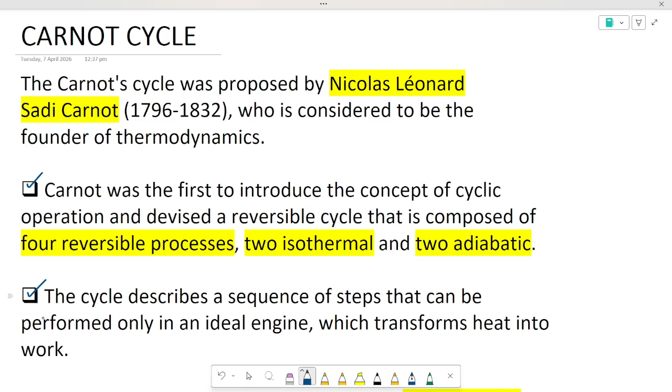Now, the Carnot cycle can be idealized as the most efficient cycle of all. Further, in your mechanical engineering, you will tackle the Otto cycle. That is the classic gasoline engine cycle. Next will be the diesel cycle, kung saan one of the cycles na you will feature the amount of pressure in terms of compression. Ibig sabihin, that is not spark ignition. Compression ignition ang tawag sa diesel. Yung Otto, that is gasoline, you need spark for ignition. Okay? So,

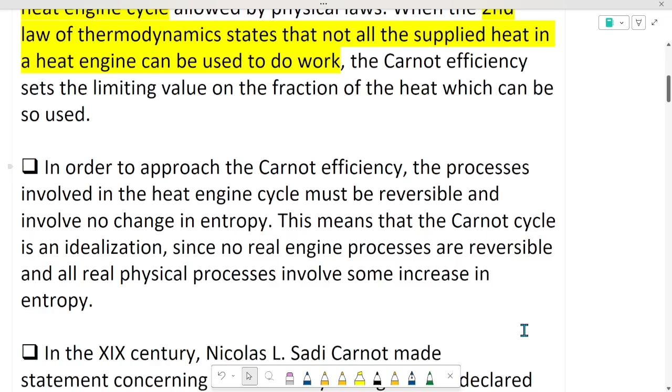sabi dyan, the second law of thermodynamics states that not all supplied heat in the heat engine can be used to do work. The Carnot efficiency sets a limiting value. So, meron lang limit yung value na yun na pwede mo i-convert yung heat mo to specific work. Hindi 100%. Okay? Now, in order to approach yung ating Carnot efficiency, ano kaya yung pinaka-close sa kanya?

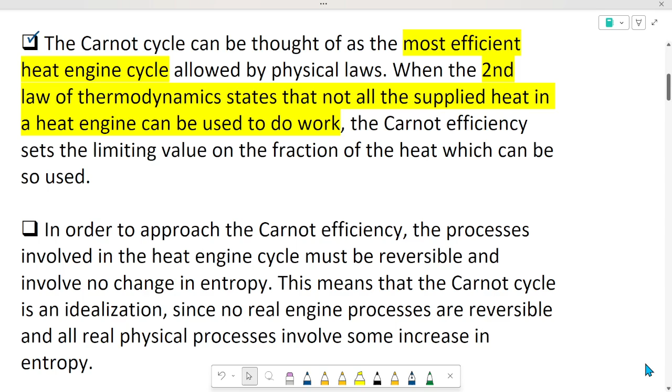So, the cycle must be reversible and involve no change in entropy. Okay, the movement of your molecules. Now, this means that the Carnot cycle is an idealization, since no real engine processes are reversible and real physical processes involve some increase in entropy. Kailangan yun. That is actual. Ang ideal is not actual. Ideal, you say there is no losses.

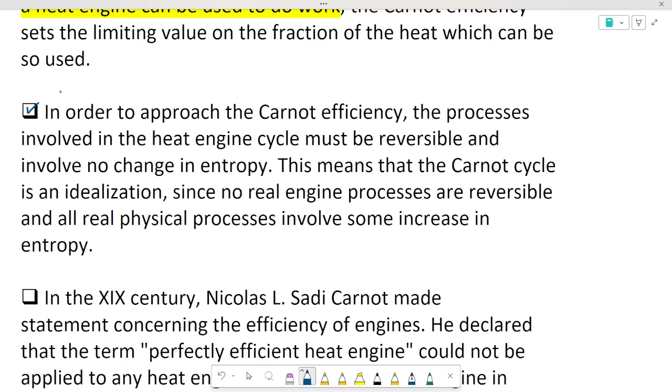So, in the 19th century, Nicolas Carnot made the statement concerning, siyempre, yung efficiency ng engines. He declared that the term perfectly efficient heat engine could not be applied to any heat engine. Okay? Not all of your fuel will be converted into useful work. Yung heat na yan, hindi yan magiging useful work.

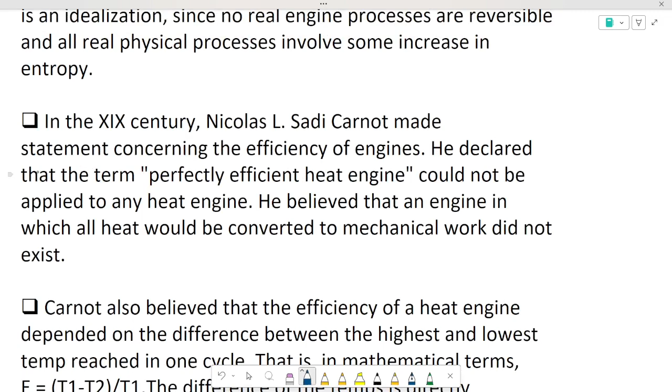So, Carnot also believed that the efficiency of an engine depends on the difference between the highest and lowest temperature reached in one cycle. Bakit kaya? Bakit sinasabing ganun? Kuwari, we have an engine.

Okay, on your combustion, you need 3 things. Ano yung 3 things na yun sa combustion nyo? You need 1, fuel. Number 2, energy, heat energy. Okay? May fuel, energy, and then, pinakamahalaga, air. Without air, kahit sandamakmak na fuel ang meron ka, it will not combust. Pero meron kang mini-measure na fuel ratio to air.

Now, kapag nag-combustion yun, it will turn out 100% energy heat. Yung heat na yun, i-absorb na energy mo, anong kailangan ipapasok mo na air sa system? Dapat yung malamig. Okay? Optimal air temperature. Hindi dapat mainit na hangin ipapasok mo sa engine mo. Bakit? The more na mainit yung pinapasok mo ulit sa engine mo, magkakaroon ka ng mas mainit na engine. Overheating hurts your engine. It's not good for your engine.

The optimal temperature for your engine to work, okay, is yung nakalagay doon sa iyong temperature gauge. When overheating happens, what will happen? Heat transfer, di ba? Everything that heats up, metal, aluminum, it expands. When it expands, ano nangyayari? Nagkakaroon ka ng leakage. Okay? So, ganun yung nangyari sa ating engine. Okay? Now, the difference of the temperature is directly proportional to the engine efficiency.

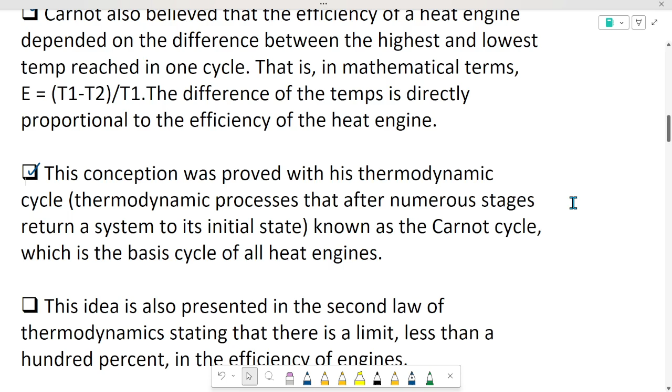So, yung idea na yan, it was proved with Sadi Carnot's thermodynamic cycle. Yung mga thermodynamic processes. After numerous stages, it returns to its initial state. When air ideally enters at 20 degrees Celsius, it should return to 20 degrees Celsius. Yun yung sinasabing ideal. Air, pinasok 20, it heats up to 200 degrees Celsius. Nag-expand yung gas, ibabalik mo ulit. Energy is expended, gagawin mo ulit na 20 degrees after heat rejection. That is ideal. Okay? But, sabi nga niya, not all engines are like that. It cannot even return to its initial state.

Now, the idea is also presented in the second law of thermodynamics, stating there is always a limit. Kahit gaano kalakas, kaganda ang pagkakadesign mo, there is always a limit. That is the actual. Okay? So, that is always less than 100% in efficiency of your engines.

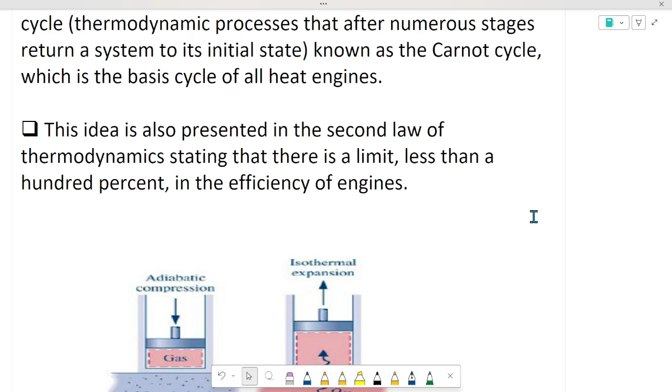Now, look at this diagram. Sabi dyan, Carnot cycle is a reversible power cycle. Anong power cycle? You use engines in order for you to turn it into useful work. Okay? So that you can operate between two constant temperature reservoirs. Ano yung constant temperature reservoir? Meron ang heat source. Meron ang heat sink. Ano yung heat source? The one that gives off heat. The heat sink is the one that takes away the heat from the engine.

Okay? Nandito yan sa ating cycle. Meron kang adiabatic compression. Ibig sabihin, there is no heat added, no heat lost. The gas is always compressed. Then next, meron kang insulating stand here. Ibig sabihin yung insulating stand, hindi siya mag-absorb ng heat, hindi rin siya mag-give off ng heat.

Next, isothermal expansion. The gas is expanded without it losing the temperature it has on the compression. So, meron kang hot reservoir, magta-transfer yung heat mo. Ito, ayan o. Hot reservoir or the hot source, it will give off the heat. After giving off the heat, it will not change in temperature, but it expands. Yan yung isothermal expansion. The next, okay, yung kay Nicolas Sadi Carnot.

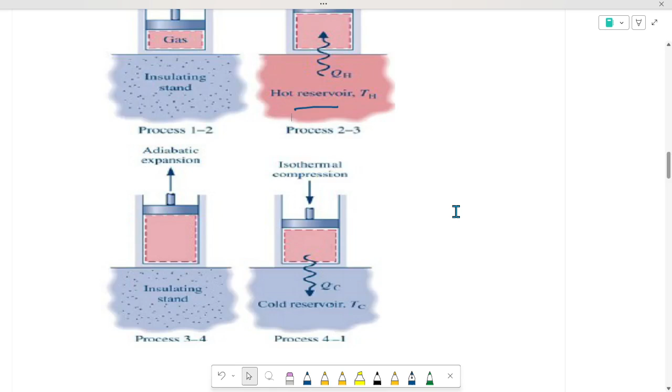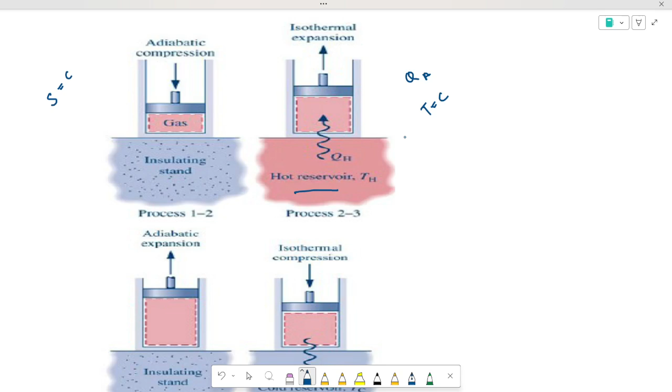First one, nangyari? That is adiabatic compression. Ano ba adiabatic compression dyan? So, S is equal to C. Compression to. Next, meron kang heat addition. Okay? Heat addition. So, Q is added, where there is isothermal expansion. Ano ba isothermal? Temperature is held constant. Okay? Next, process 3 to 4.

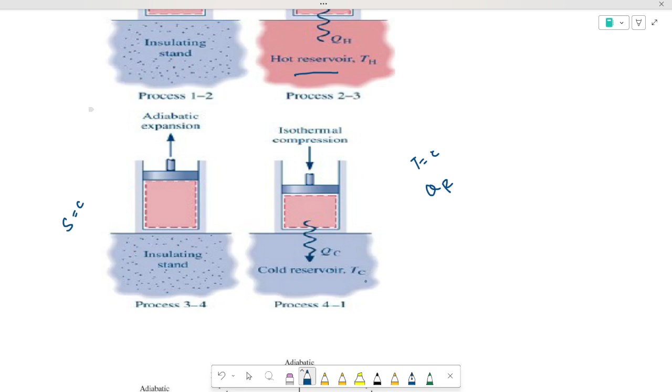Meron ka rin dyan na adiabatic expansion. Nag-expand siya adiabatically. So, S is equal to C. Kaya lang, nag-expand. And then, process 4 to 1, returning to the initial state, a cold sink or a heat sink where the heat is absorbed and magkakaroon ka ng temperature constant where heat is rejected. Okay? Now, recall natin.

Sir, process 1 to 2, adiabatic compression. That is S. Ano yung constant? S. Isothermal expansion. Ano yung constant? T. Process 3 to 4, ano yung constant? Adiabatic expansion, S.

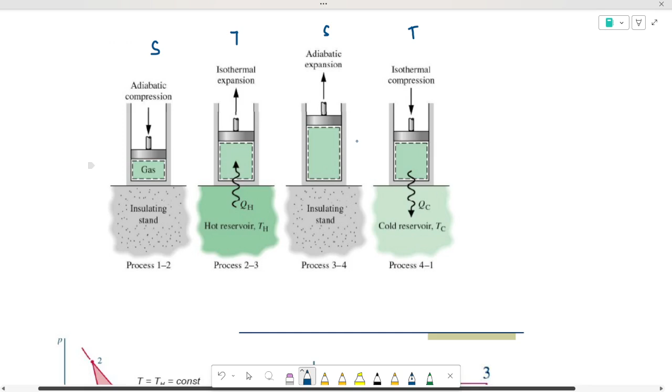Again, meron tayong pressure and volume and TS diagram. Now, on your gas power cycles, the best way for you to understand it is to draw the diagram every cycle from Carnot. Next, Otto. Next, diesel. Okay? Pwede rin naman yung, tandaan nyo, yung Carnot. Di ba? Two words, Carnot. Okay? On our wordings, Carnot.

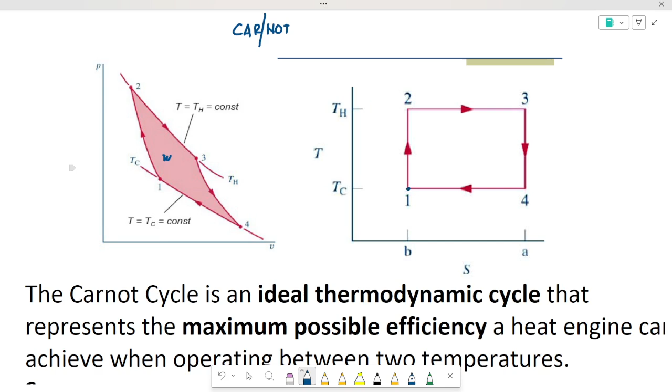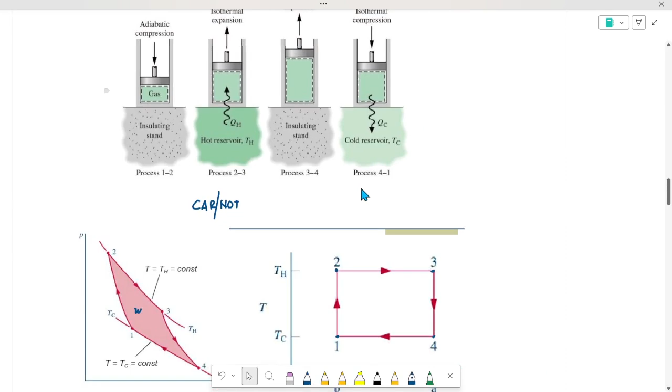Okay, in here, ito yung diagram niya kapag Carnot cycle. Starting from your initial point, initial point is 1, going to 2, going to 3, going to 4. Balik tayo dito. Adiabatic compression. Saan nangyayari yan? Process 1 to 2. So, at process 1 to 2, adiabatic compression. So, S is equal to C. Nasaan yan? S is equal to C.

Next one. Process 2 to 3, isothermal expansion, where heat is added, 2 to 3. Dito papasok yung QA mo. At that process, 2 and 3, 3 is the highest temperature of your system, and 2 is also the highest temperature. Heat is added, but there is no change in temperature.

Okay? Next. Babalik na dito sa 4. Ibig sabihin, heat is lost. So, S is equal to C, where heat is lost. Heat added, heat is lost. So, that is the way na yung process mo works for your isentropic, for your Carnot cycle. Again, yung work dito ay equal sa network dito. The network of your system is the area under your diagram. Okay?

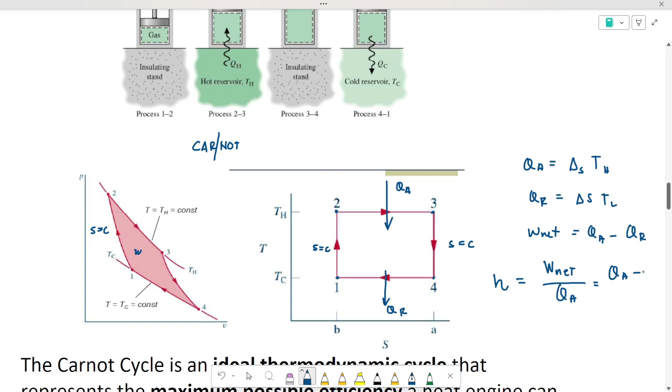Now, the efficiency of your cycle is eta. Efficiency of the cycle, that is the total amount of work done on the system divided by your total heat added. So, QA. Ano yung network natin? QA minus QR over QA.

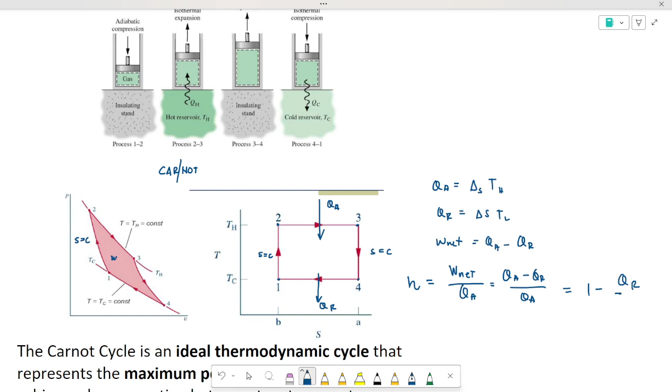So, simplifying, wala tayong notes ha, ni-isa-isa natin. Simplifying, ibig sabihin, you can factor out yung QA. So, 1 minus QR over QA. O, yan na yung ating network.

Sir, pwede pa yung masimplify? Yes, pwede pa. So, 1 minus yung QR kasi natin is delta S TL, divide by delta S T high. Ibig mo sabihin, sir, pwede pa? Pwede pa.

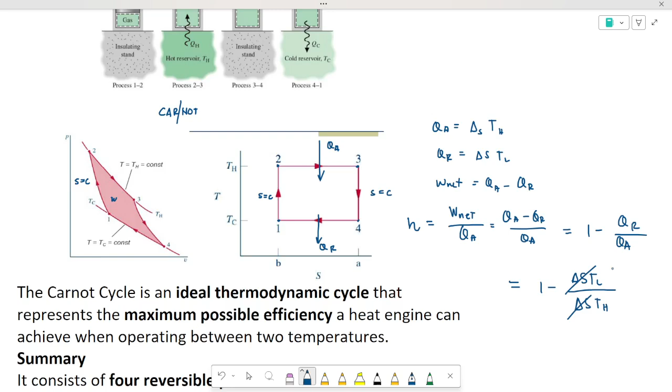Ibig sabihin, our net or efficiency of the cycle, thermal efficiency, is 1 minus TL over TH. So, that is for your Carnot cycle. Kuha ba? Dali lang.

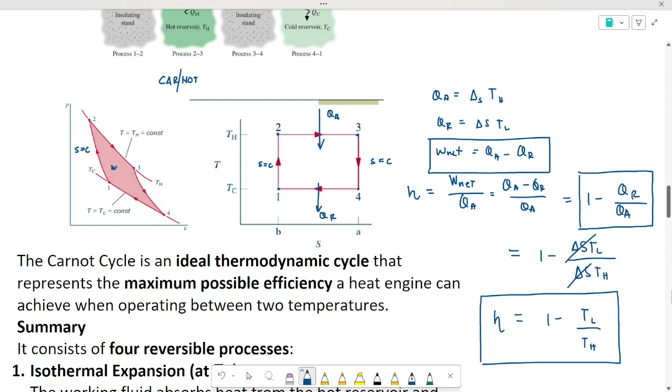So, yun yung mga formulas natin for Carnot. Sir, madali lang pala ang Carnot. All I have to do is to draw the diagram. Correct. Just draw the diagram in order for you to know the formula for every process.

Now, let us summarize. The Carnot cycle is an ideal thermodynamic cycle that represents maximum possible efficiency. That's why it's called the most efficient of all the cycles. A heat engine can achieve this when operating between two temperatures only, a high temperature and low temperature sink. It consists of 4 reversible processes.

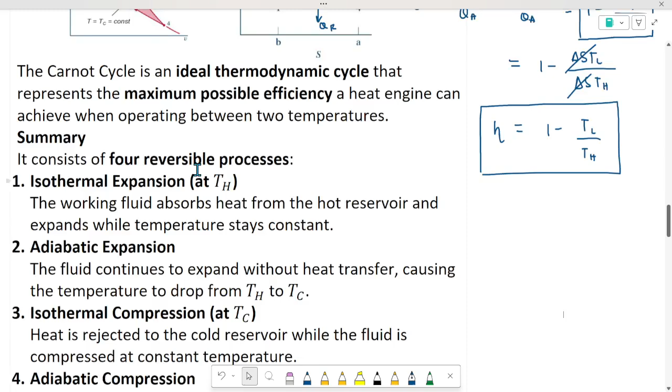Isothermal expansion from 1 to 2. Next, adiabatic expansion. Ibig sabihin, your isothermal expansion, heat is absorbed. Doon sa kabila, isothermal compression, heat is rejected.

Okay, so key idea, the maximum efficiency limit of any heat engine is derived from the second law of thermodynamics. I think that is the law of entropy.

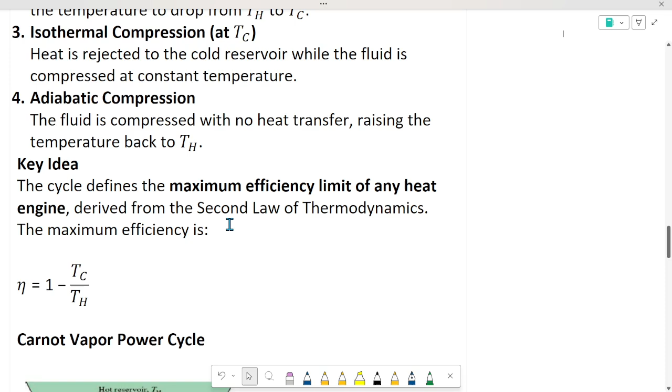Now, pwede rin naman yung Carnot vapor cycle dito, it will be discussed to you on your combustion. Hot reservoir - meron ka dyan boiler, and then condenser, meron kang turbine for your work, and then the pump, yung useful work.

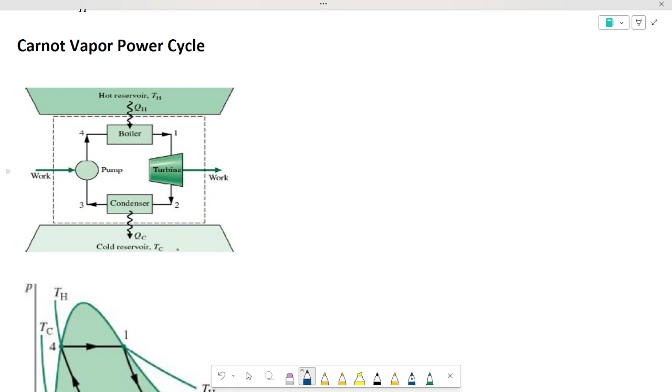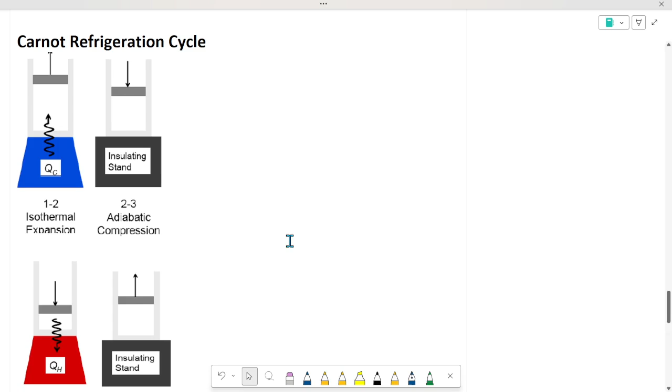So, ano ba yung mga corollaries ng inyong thermodynamics second law for your Carnot? Sabi dyan, it limits how the cyclic devices such as heat engines and refrigerators operate. Now, according to Kelvin Planck statement, a heat engine cannot convert all heat to work.

Now, the Clausius statement states that a refrigerator cannot transfer heat from a colder body to a hotter body. It just takes off the heat without external work input.

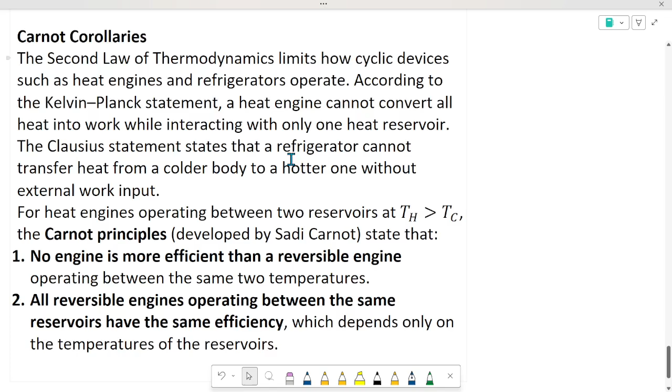For heat engines, tignan nyo to: no engine is more efficient than a reversible engine. Ano yung ibig sabihin mo doon? Kapag naibabalik mo siya doon sa initial state.

Close to initial state, all reversible engines operating between the same reservoir have the same efficiency. That is correct, which depends only on temperatures. Kaya ang Carnot, it depends only on the temperature difference. The greater your temperature difference, the greater the efficiency is. Ngayon, kapag mas maliit yung difference ng temperature mo, mas mababa yung efficiency ng cycle. Kailangan, mas mataas yung kanyang layo sa isa't isa.

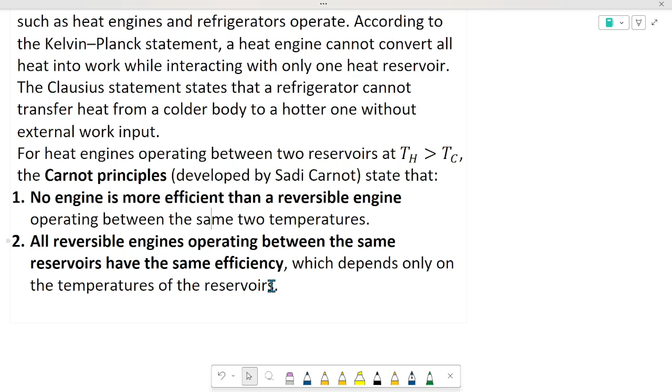Kunwari, 10 degrees Celsius, yung heat niya is 100 degrees Celsius. So, 1 minus 0.1, that is 90% yung thermal efficiency. Paano naman kapag 20 degrees Celsius, yung hot temperature niya is 30 degrees Celsius? Siyempre, mababa yung efficiency nun, because heat is not taken away. Nandun lang yung heat, kunti lang yung temperature difference.

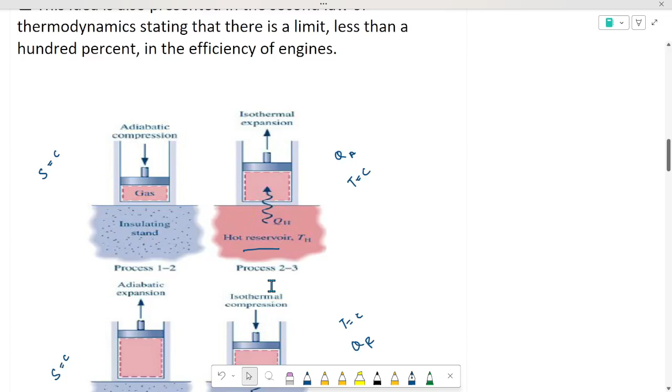Okay, so that is Carnot cycle discussion. Meron tayong prepare na ilang problems here, I'll show you the problems. I think I have 3 problems we'll tackle in a later while.